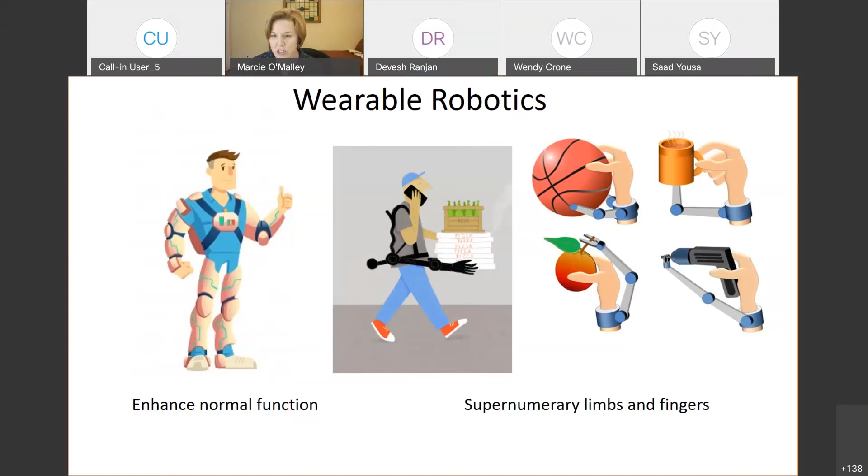So we're going to be diving into just a subset of this area of wearable robotics today with our two speakers. I'm really excited to introduce both Elliott and Aaron, Elliott Rouse from the University of Michigan and Aaron Young from Georgia Tech. Both of these gentlemen are focused on the design and control of wearable prosthetic and orthotic devices for the lower limb. Let me just briefly introduce each of them.

The Big Ten is strong here today.

Elliott is an assistant professor in the Department of Mechanical Engineering at Michigan and a core faculty member in the Robotics Institute. He directs the Neurobionics Lab. His degrees are from Ohio State and Northwestern. He did a postdoc at MIT and was the winner of the NSF CAREER Award.

I asked both Elliott and Aaron to share with me what they think are some of the challenges in the field of wearable robotics. Elliott said he's excited about how we might develop better ways to quantify success of wearable robots beyond the usual quantification of metabolic cost. In fact, it's recently been shown that people are quite insensitive to metabolic rate, which makes that metric less than ideal as a measure of success.

And a fun fact about Elliott is that he left his previous career as a mechanic for a professional auto racing team because he wanted his work to have greater impact on people with disabilities. We are also both from Ohio, so that's another fun little fact.

Aaron, our second speaker for today, Aaron Young, is an assistant professor in the Woodruff School of Mechanical Engineering at Georgia Tech. He directs the Exoskeleton and Prosthetic Intelligent Controls Lab, or EPIC Lab. We are fellow Boilermakers, and he got his master's and PhD in biomedical engineering at Northwestern. He postdoc'd at Michigan, and he recently received the NIH New Investigator Award and the IEEE New Faces of Engineering Award.

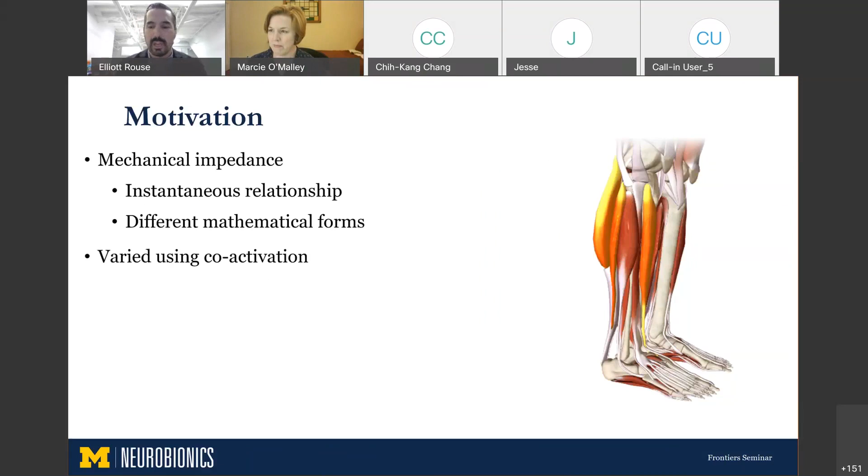Muscles can only pull, so to provide motion and torque in two directions, we have agonist and antagonist musculoskeletal architecture. By flexing these two muscles together, we can change the stiffness without changing the net torque or the joint's position. So we actually have independent regulation of kinetics, kinematics, and this concept, mechanical impedance.

This isn't just a theoretical or mathematical property—it really matters to locomotion. It describes how energy is stored and exchanged between the joints of the leg and how disturbances travel from the center of mass, or from the ground, to the center of mass. These are properties critical for efficient, stable, and agile locomotion.

We often, as roboticists, go back to biology as a blueprint for design and control, and we've seen amazing advancements in this space. An example is agility robotics by Professor Jonathan Hurst, the Cassie robot.

I believe in wearable robotics, bio-inspired dynamics could lead to a more natural response to disturbances, a more intuitive human-machine coupling, getting away from the feeling of riding the technology you're wearing, and ultimately exploitation of the advanced capabilities of the human neuromotor system.

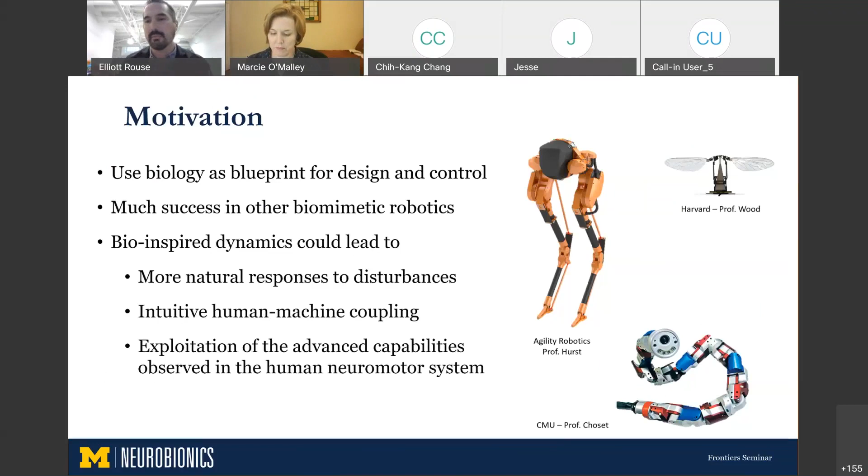This will come up later in the talk, but this two-dimensional set of information is what we would use to design a bio-inspired system.

If we think about what system dynamics or stiffness should the system have to replicate biology, for the past probably 100 years of biomechanics, people would take the slope of this torque-angle curve—it has the right units, Newton meters per radian or Newton meters per degree—and they would call that the stiffness. So it would be something like this.

But as it turns out, that's not true. That's mathematically inappropriate. When muscles are doing work on the body, you can't just take the slope of this curve. Stiffness is a separate property, and some work I did earlier in my career made this point.

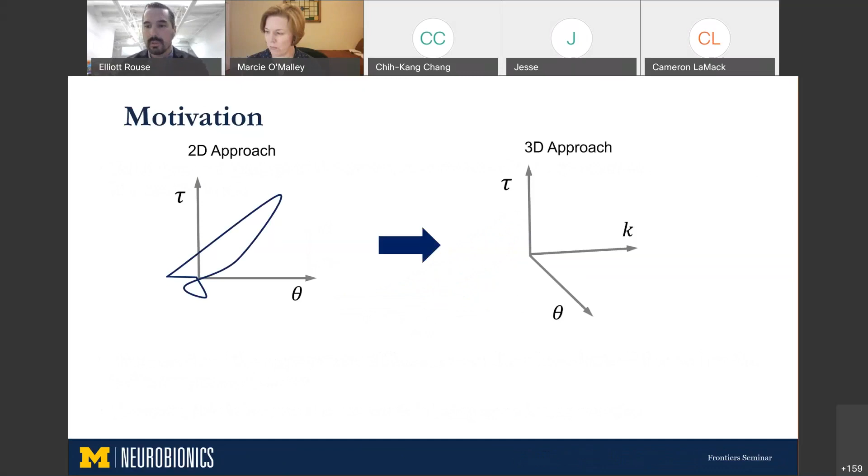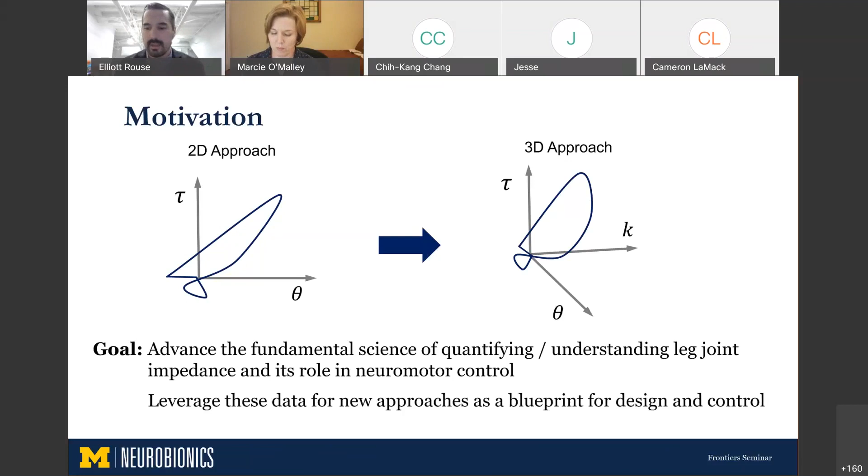One of the overarching goals of my research program is to translate this two-dimensional information of torques and angles to a new type of blueprint, a three-dimensional set of instructions, where we can vary and control not only the torques and angles, but also the joint stiffness information. I would call this probably one of the fundamental goals of my research program: quantifying and understanding these properties, both in the context of wearable robotics and neuromotor control. My hope is that we can leverage this information as a new blueprint for the design and control of assistive technology, and I'm going to talk about this set of information in this talk.

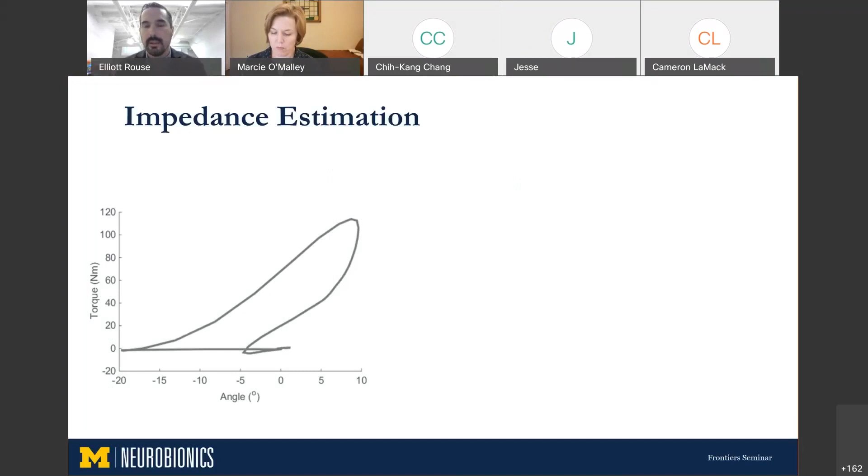The first thing I'd like to describe is how we might get mechanical impedance as a blueprint. Over the last 6 years, we've been working on these methods using the same torque-angle relationship of the ankle, where every step you go around this cycle. To understand the stiffness or mechanical impedance properties, we have to interact with the limb or apply perturbations. Our approach has been to apply perturbations at discrete points within the gait cycle, giving us snapshots of how these properties vary. If we stack these snapshots up in time or in phase, we can get an idea for how the neuromuscular system is regulating these properties. So we've been developing these methods.

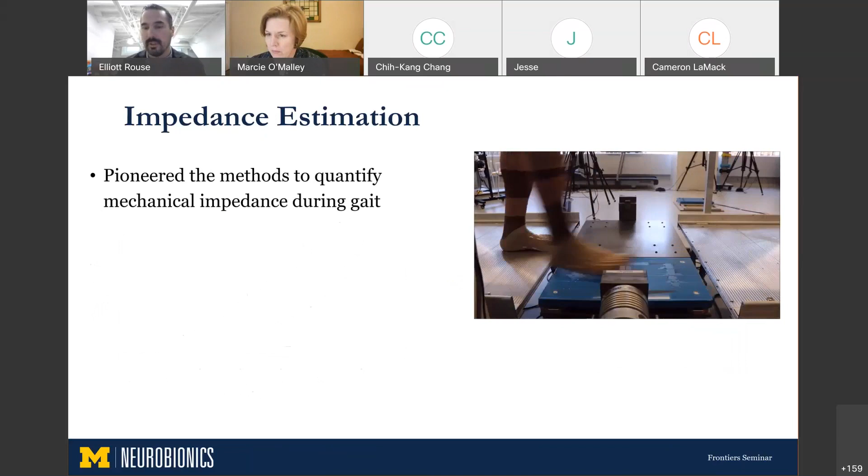This is an example of our experimental paradigm. Someone walks across a walkway and experiences a slight perturbation, about 2 degrees. That blue thing in the video is a force platform, so we measure the force between the foot and the ground. Then we fit a model, a second order mechanical model, between the perturbation displacement and the perturbation response torque, using system identification techniques.

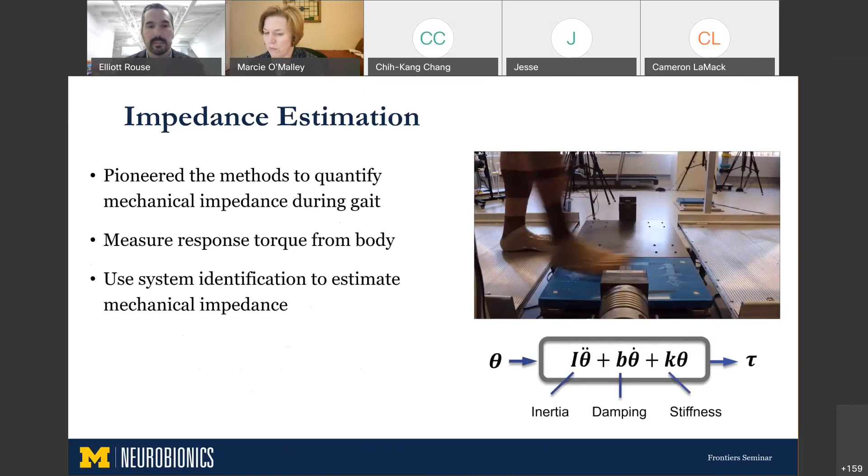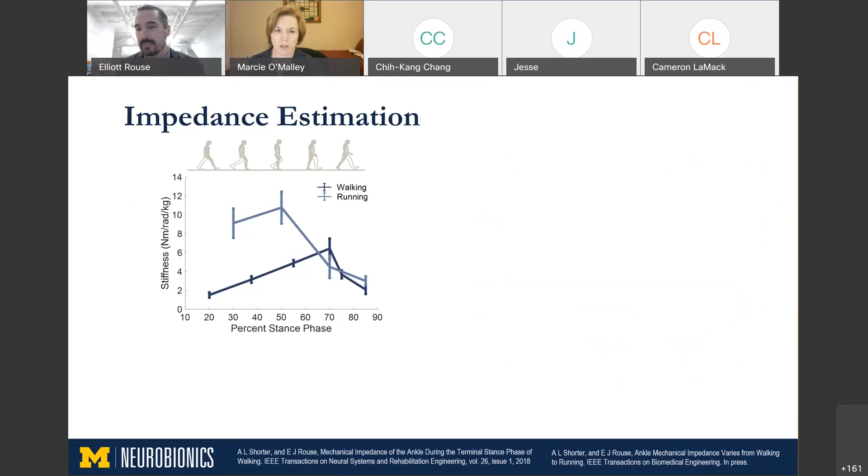What I'd like to show you now is some data we've published recently. In this plot, we're looking at stiffness as a function of percent stance phase. In light blue, we show data from running, and in dark blue, data from walking. The new data in the walking study was the last 2 points, showing what's happening during terminal stance phase. We showed that stiffness is actually much higher in the ankle joint during running, with a similar profile where it increases and then begins to decrease in terminal stance phase, occurring a little earlier in running biomechanics.

If we look at damping, we also see much different responses, consistent with the literature, that the stiffness and damping during running would be much higher because the muscle activation is greater, and damping is known to co-vary with muscle activation.

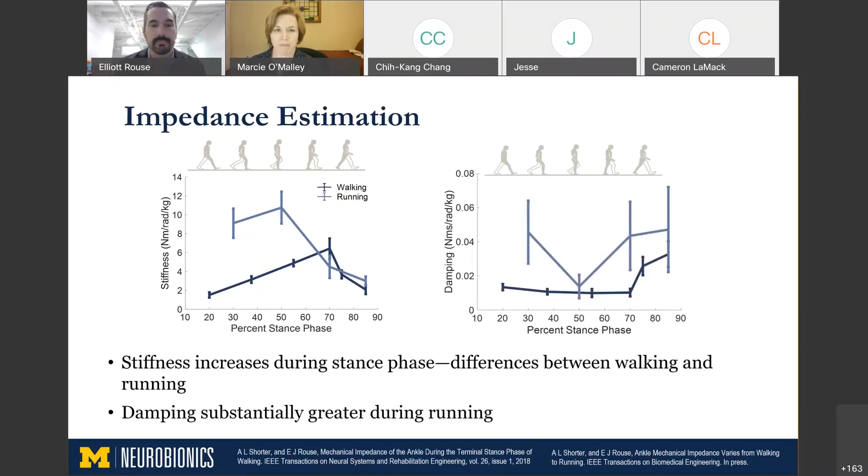One exciting thing I'd like to highlight is that we've also been thinking about extending these methods to quantifying pathological impairments. If you have an upper motor neuron disease like stroke or cerebral palsy, that manifests in changes in coordination and joint mechanics, inhibiting mobility and making it much more difficult for people to walk. These changes, called spasticity and hypertonia in the clinic, we would call stiffness and damping in mechanical engineering. So we can get insight into the changes that occur following a stroke by measuring the mechanical impedance as people walk.

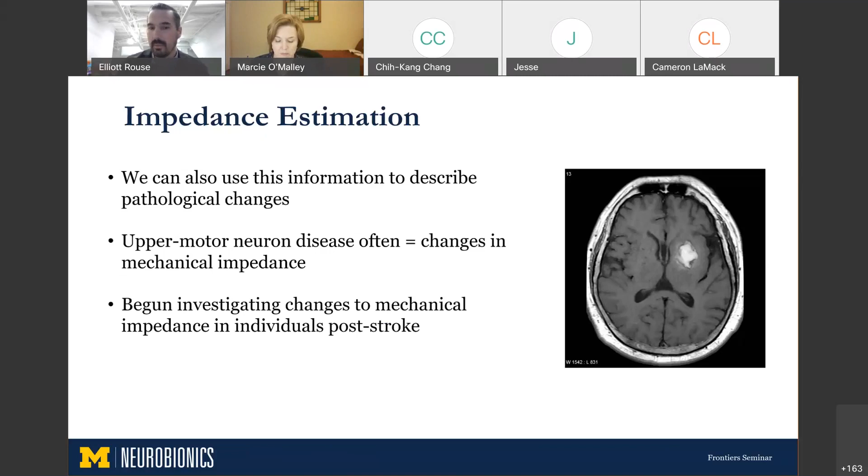These are some data from a recent study we just completed. Again, we're looking at stiffness as a function of stance phase, but here the dark blue line represents the non-paretic side of a person who's had a stroke, the light blue is their paretic or affected side, and gray is older, healthy subjects that are age and speed matched. What we see is that the stiffness of their non-paretic side is actually much greater, while the stiffness of their paretic side is consistent with age and speed matched controls.

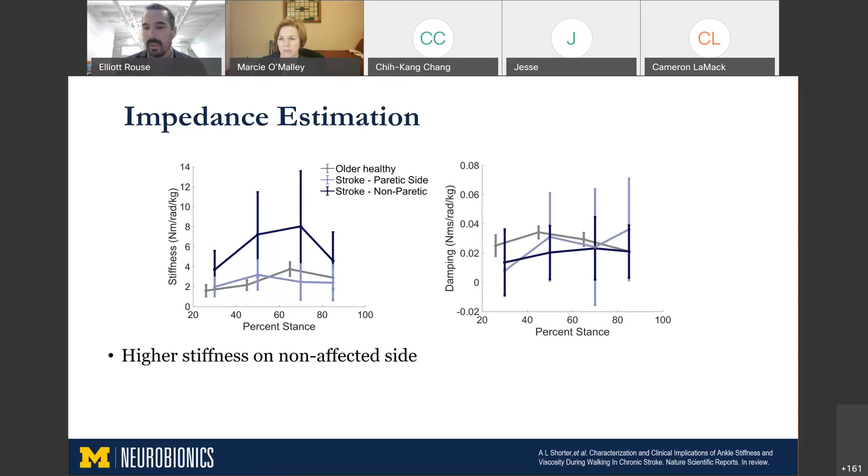For damping, we actually see no changes or increases in data that's consistent with the age and speed matched controls. This highlights an important point about treatment of spasticity and hypertonicity in people with stroke or cerebral palsy, where clinicians get this information by interacting with patients' joints while they're seated at rest, subjectively scoring it on a measure between 0 and 4. Historically, the literature would say we should see increased stiffness and increased damping on the paretic side, but we actually don't see that.

We see no increase in damping at all and no increase in stiffness on the affected side, where we do see a large increase on the non-affected side. I think that's likely due to the greater activation, the harder they're working on their non-paretic side to help push themselves forward during the gait cycle. I think these data really begin to highlight that we need a new way to quantify and assess the changes that occur post-stroke so that we can appropriately treat these patients.

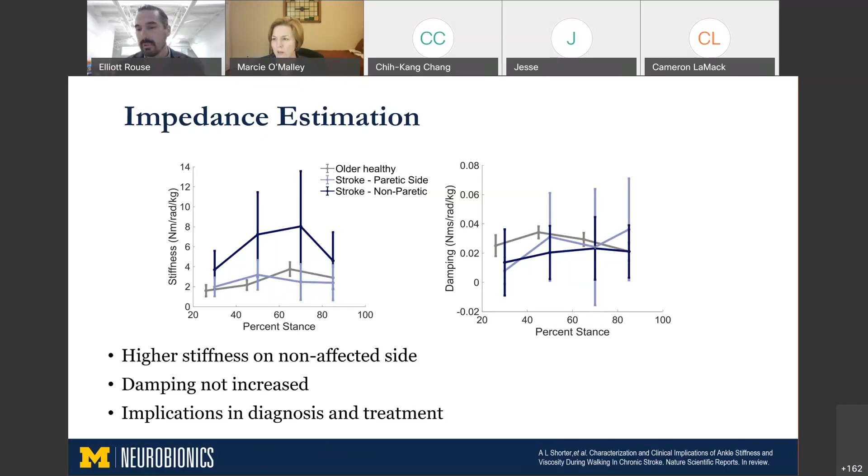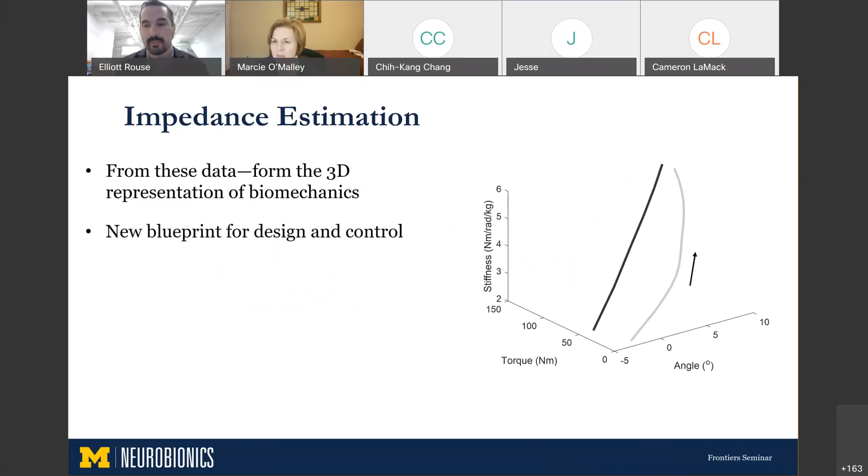What I'd like to talk about for the next few minutes is how we've translated this into wearable robotics. We showed that for the first two-thirds of the gait cycle, or stance phase, a passive system can actually replicate the mechanics of the ankle. So we've designed a quasi-passive ankle foot prosthesis that can replicate torque, angle, and stiffness at once, up until the powered part of the gait cycle. I'll tell you about this variable stiffness prosthetic foot that we've developed.

So this is our technology. We call it the variable stiffness prosthetic ankle foot, or the VSPA foot for short. It has a couple of innovations I want to draw your attention to. The transmission in this system is cam-based, which allows us to specify the exact torque angle mechanics that we want. We're not confined to the mechanics of carbon fiber leaf springs that are consistent with today's conventional prosthetic feet.

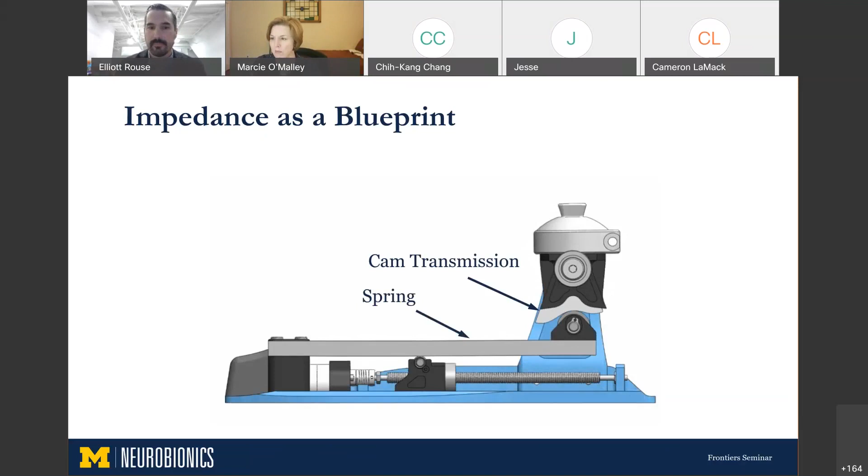So when someone rotates their ankle joint, it deflects that spring and we store and return energy. We can shape this torque angle biomechanics in any way that we want, which is a special property of this prosthesis.

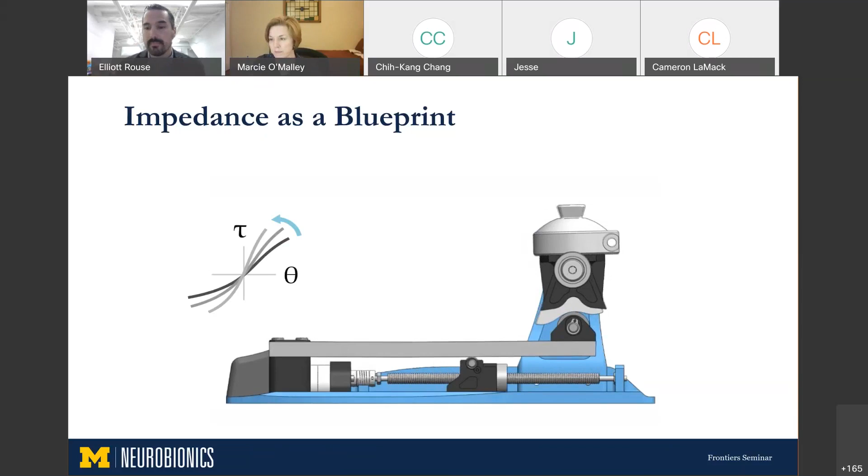The next innovation I'd like to draw your attention to is that we can change the stiffness of this foot by changing the support condition of this cantilever spring. Essentially, we can take our custom torque angle curve and basically rotate it around the origin by modifying the support condition. We would adjust the stiffness step to step while the foot is unloaded. I think this is among the first variable stiffness ankle prostheses that have been developed.

Another innovative design has been developed by Peter Adamczyk at Wisconsin. It's worth looking into.

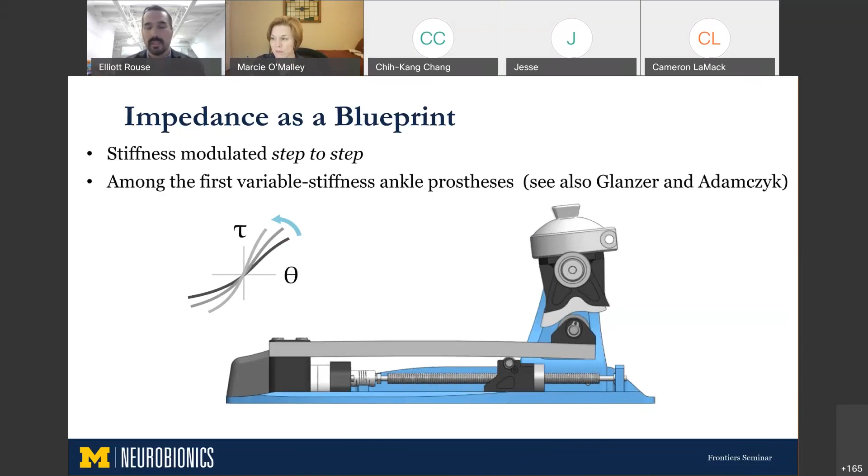This is just a video of somebody walking with the system. You'll see they store energy at heel contact, then return energy, and then store it again over controlled dorsiflexion. They push off with the energy that's been stored. If you look very closely, you can see a slight underdamped response from the ankle, which comes from its efficiency.

We used our torque angle curve to create the appropriate mechanics that would be following torque, angle, and stiffness at once for the first two-thirds of stance phase. And we tested this on the subject.

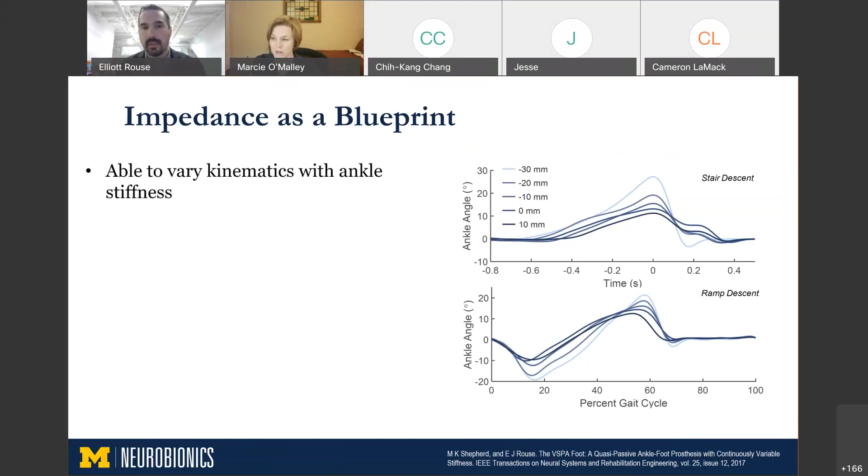You're looking at a single subject's kinematics as a function of percent gait cycle for two different activities. The different lines here represent different slider positions, or different stiffness configurations. What I'd like to highlight is that we were able to vary kinematics by changing ankle stiffness, and we were able to show a much more natural agreement with the range of motion of healthy biomechanics, in part because we can make this foot much less stiff than conventional prostheses, which are quite stiff and have a very constrained range of motion.

Something I'm excited about that I mentioned earlier is that we're translating this out of the lab, and it's being commercialized by a company called Willowwood. I'm very excited to see this potentially impact the lives of patients, hopefully in the next few years.

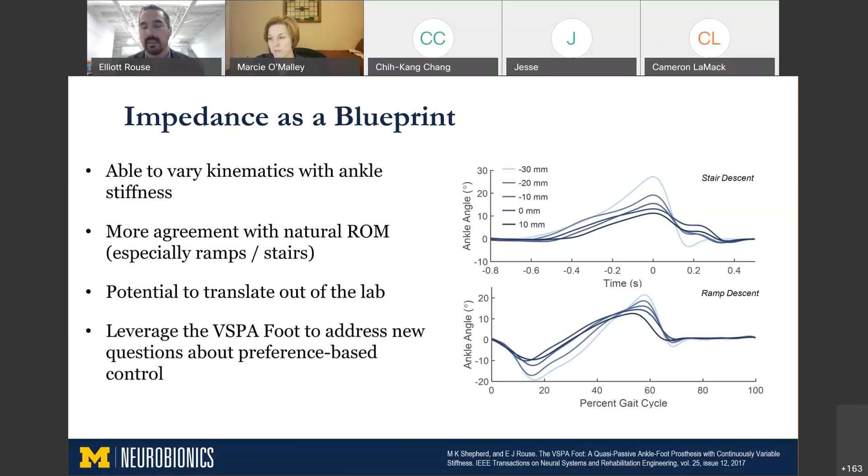So what I'd like to do now is shift gears a little bit and tell you about how we've used this new system, this variable stiffness foot, to address some pretty neat questions in preference-based control. We're going to talk about user preference now and wearable robotics.

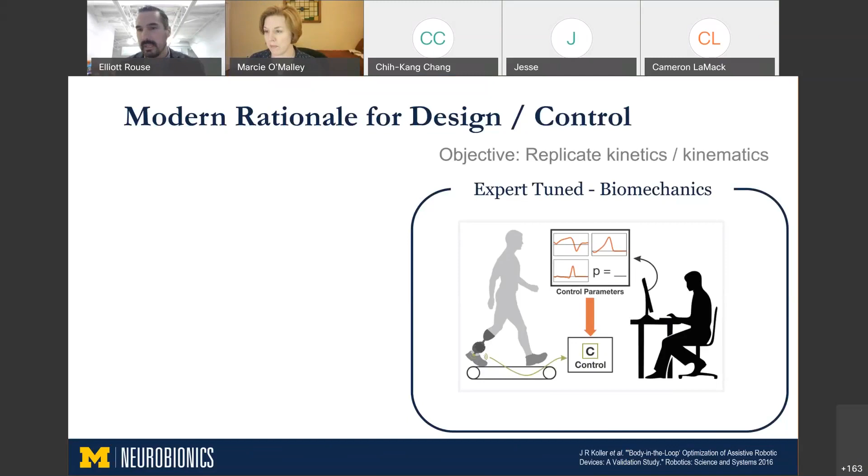The modern rationale for design and control of wearable robotics consists of really two philosophies. The first is expert tuned based on biomechanics, where the objective is to replicate kinetics and kinematics. There's also a relatively new philosophy called human-in-the-loop optimization, where instead of an expert tuning based on biomechanics, the controller is tuned automatically based on a physiological objective function, often metabolic cost. The system tunes itself to reduce the metabolic cost of the wearer, and there have been some very successful studies with this approach.

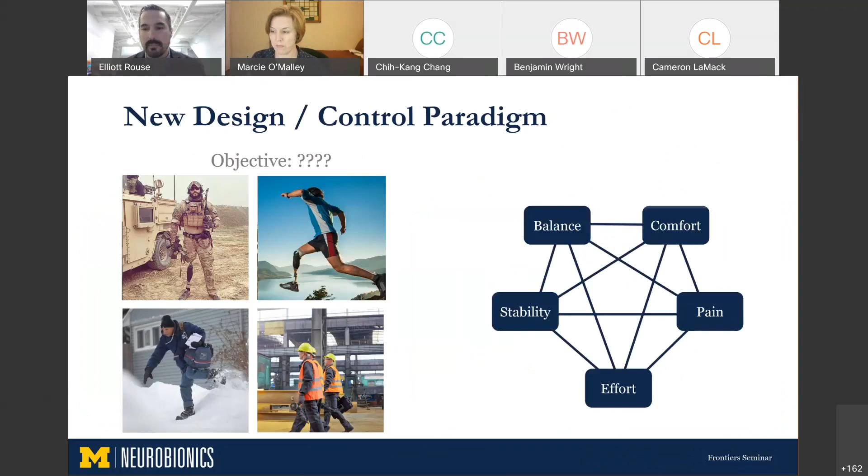But in my research group, one of the things we think about is that people's objectives likely change over time and with different activities. It's not likely that there's one objective that meets the needs of every person in every activity. People probably care about a host of different things: balance, comfort, pain, stability, effort, and the exact emphasis they place on any one of these might depend on the person or the task. So one of our approaches has been exploring using user preference as a way to gauge what the person actually wants, using all of these factors at once and letting the subject tune their own system.

So what I'd like to do for the next 15 minutes is tell you about four project vignettes. These are questions that we've been answering recently.

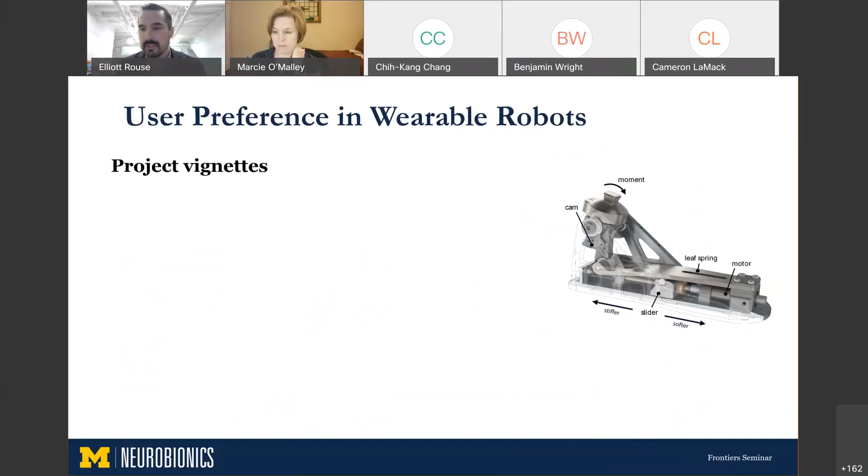The first question I'd like to discuss is: what ankle foot stiffness do people actually want? We don't know that, in part because we never had a system that could change its properties step to step. So let's start by figuring out what people actually care about.

The next question we asked is how does user preference differ from clinician preference? Then we looked at what underlying mechanisms may drive preference—what might people be sensing that's governing their response—and maybe can we use this information in the future to guide the design and control of these systems?

And then finally, I'll switch gears a little bit and tell you about some of our more recent work on preference-based control of ankle exoskeletons.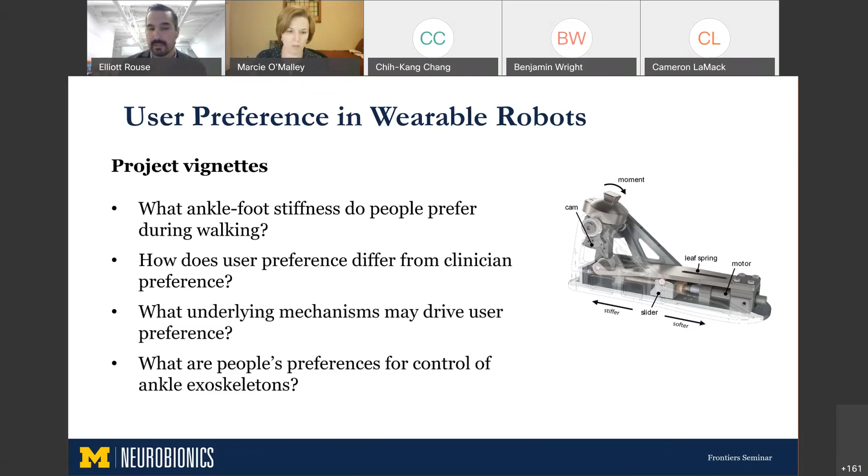The first question we wanted to answer is what stiffness do people actually want? So we created a cam profile for our variable stiffness foot that was linear. I'm showing the torque angle curve here—it's a simple torsion spring. People have access to change the stiffness of their foot by controlling a dial mounted to their waist. As they adjust the dial, we adjust the stiffness automatically while the foot is in swing phase between their steps.

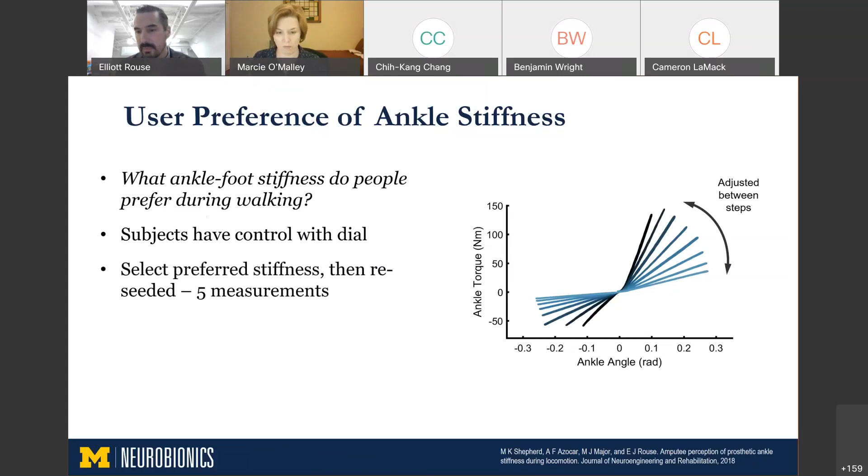We had people walk on a treadmill. We had them find their preferred stiffness using the dial and explore the space. Then we stopped the treadmill, randomly reseeded the dial, and started over again. We did this five times to get an estimate not only of what stiffness people prefer, but the distribution, or variance, associated with it. And the data looks something like this.

We're looking at preferred stiffness here for each subject. There are two things I'd like to draw your attention to. First, people are very consistent—the coefficient of variation here is 14%, so people are actually surprisingly reliable when selecting their preferred stiffness. The next thing I'd like to point out is that people have pretty different stiffnesses, varying by up to a factor of 3 or 4. And all of these subjects had about the same activity level and about the same body mass.

That means when they go to the clinic, if they went to the same clinician, they'd all get fit with the same prosthesis. Yet each person has a different preference, and in fact these preferences span by quite a large amount. I think this has important implications for the future prescription of prostheses. The takeaway here is that people are sensitive, consistent, and diverse in the selection of their stiffness preferences.

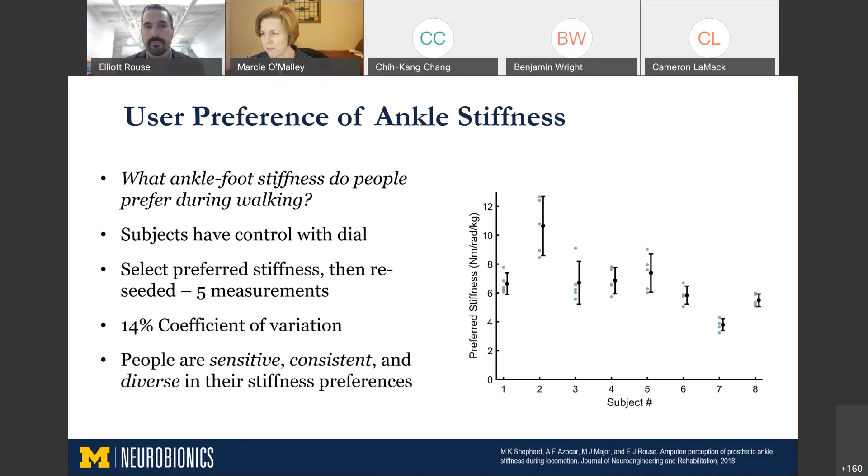The next question we answered is how does user preference vary from clinician preference? This is an interesting study paradigm where we had seven prosthetists observe seven people with amputation during walking. Not every prosthetist observed every patient—we had a group of prosthetists observe a single patient, and we repeated that for all subjects.

Subjects walked across a walkway in front of prosthetists 39 times at 13 different stiffness values. Each prosthetist indicated, based on observation of the person's gait, whether they thought the stiffness should be increased or decreased. Similarly, the experimental subject with amputation also noted to the experimenter whether they would like the prosthesis stiffness to increase or decrease.

We use these data to create psychometric functions that describe consistency and preference associated with stiffness. I'm not going to share those exact functions and psychometric curves because they take some time to unpack, but I have them in backup slides if anybody's interested to see them.

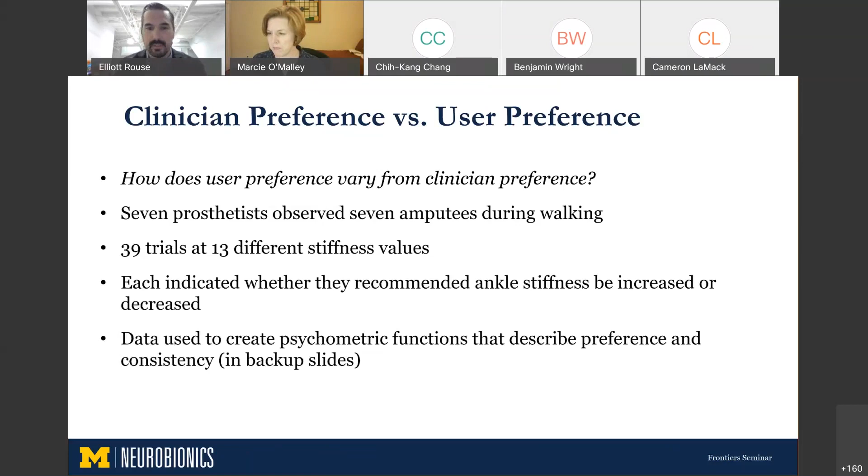This is an example of what the study looks like. Here's the prosthetist observing the patient. And if you look in the back left corner, you see my former student, Max Shepherd, who just graduated and is now working with Aaron Young and Greg Sawicki at Georgia Tech.

These are the data from this study. On the y-axis here, we have the percent difference of the stiffness from the below-knee amputee's preference. So 40 here would say that the prosthetist preferred a 40% stiffer prosthesis compared to the patient. Each color here denotes a different prosthetist.

There are a few things that matter about this plot, but given time constraints I want to draw your attention to one thing: prosthetists prefer, on average, a much stiffer prosthetic foot, about 26% stiffer. This did vary between clinicians and subjects, but what's really important is that subjects have a preference that's much less than prosthetists.

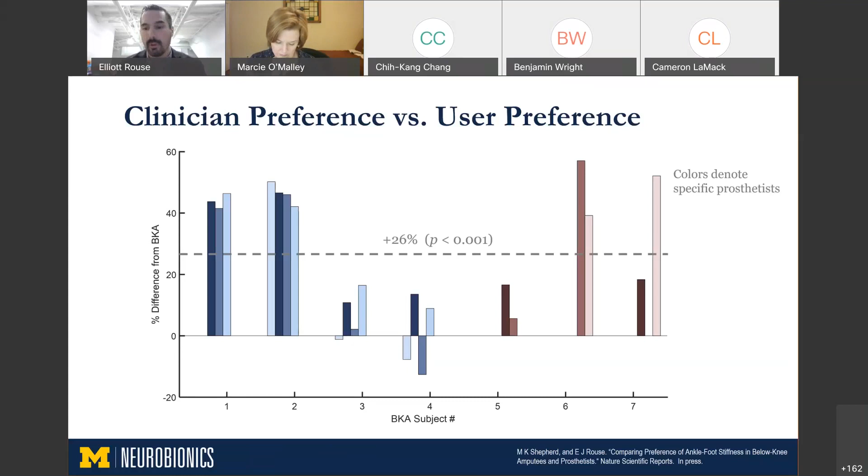The reason prosthetists probably prefer much stiffer feet is because that's the way feet are built today. These carbon fiber conventional prosthetic feet are quite stiff, and they're likely informed by the biomechanics they've been seeing throughout their careers, and now have converged to a stiffness that's much stiffer than maybe what people actually want.

The last project in this series I want to tell you about is maybe what's driving preference. What are people sensing that's actually informing them of their preferences, given that they're so reliable?

For this experiment, we measured 3 people who walked at fractions of their preferred stiffness. So we found their preferred stiffness, had them walk on a treadmill, and then had them walk at stiffness values that were plus and minus 15% and plus and minus 30% away from their preference. We did this across 3 different speeds.

We measured metabolic rate and full biomechanics using an instrumented treadmill and motion capture, and looked at how these kinematic and metabolic factors vary with stiffness. These are the data from this.

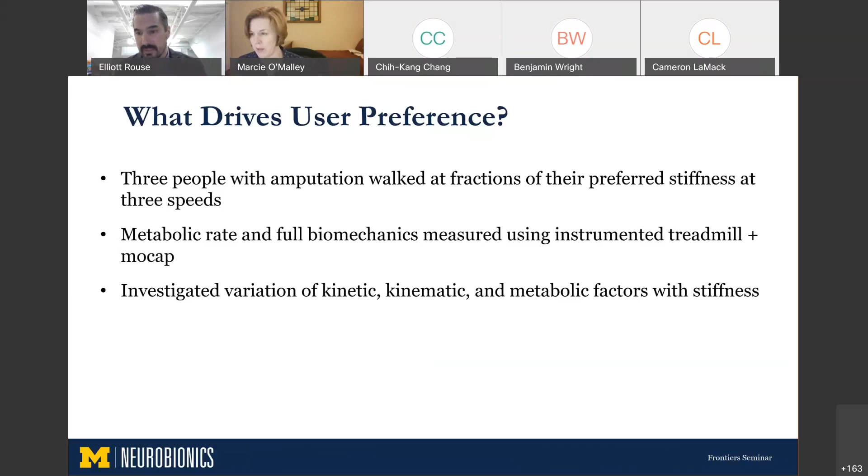I'd like to walk you through these plots from left to right. On the left-hand side, we're showing metabolic cost as a function of ankle stiffness, which is percent deviation from preferred. So 0 represents the subject's preferred stiffness, and then we see plus and minus 15 and plus and minus 30%. Looking at metabolic cost, we see really no relationship associated with stiffness.

The different colors here represent different walking speeds. We see a clear trend with walking speed, but we don't see any trend with stiffness. So people don't seem to be selecting their stiffness based on their metabolism.

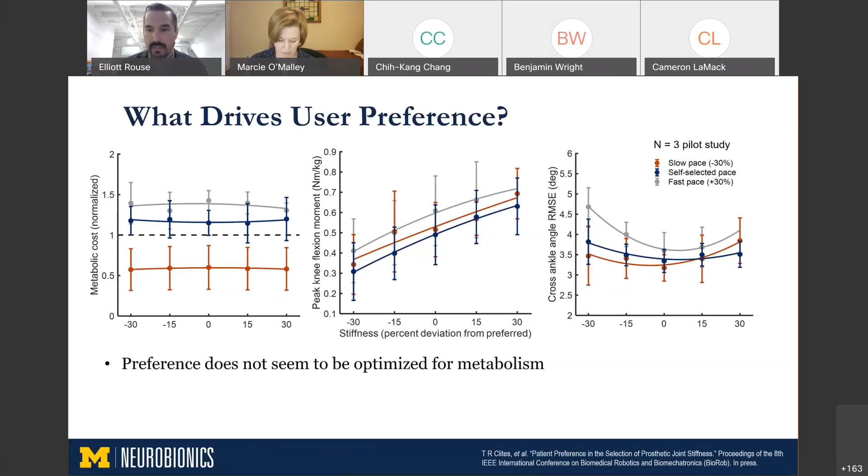In the center plot, we have peak knee flexion moment on the sound side. What we see here is a linear relationship, which suggests that nothing is really being optimized. If they wanted less or greater knee flexion moment, they would move to one of the extremes, either less stiff or more stiff. So no discernible optimum shown.

But then, looking at the plot on the far right, we're looking at cross ankle angle root mean squared error as a function of stiffness deviation. What we see is a second order, or parabolic, relationship that has its vertex within a 95% confidence interval that includes their preference. So it looks like what people are actually feeling that might be guiding their preferences is their kinematic symmetry. They want stiffness values that maximize the symmetry between their prosthetic side and their sound side. And that's a really exciting result.

So the takeaways for this section of the talk are that prosthesis users prefer a much less stiff foot than what is available. Prosthesis users have diverse and consistent preferences. Prosthetists prefer a much stiffer foot, which is more like what's available today.

Users are far more consistent than clinicians in the selection of their preferences, and that stems from these psychophysical curves that I can talk about in the future. And people may prefer stiffness values that improve their kinematic symmetry at the ankle joint, which could have potentially far-reaching effects for the design and assessment of these technologies.

The way that we parameterize the torque being provided by the exoskeleton is using peak torque timing and peak torque magnitude. This plot shows an example of the assistance that would be provided by the exoskeleton, and this really mimics the push-off phase of the gait cycle where the calf muscle is contracting and the exoskeleton helps push them forward.

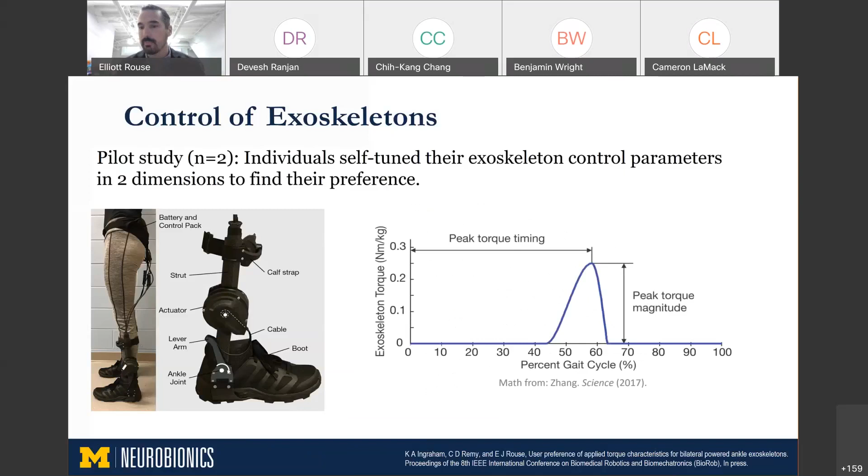We built this into a 2-dimensional touchscreen. Here you see it on a little screen; now we have it on a large tablet. When subjects select on the screen, it maps their selection in 2 dimensions to these different profiles, peak torque magnitude and peak torque timing, and an example of the profiles are shown on the screen. We asked them to explore the space and find the settings that they liked.

On this plot, the x-axis is peak torque timing, y-axis is peak torque magnitude, and you can see where they started. They explored the different control parameters and then found what they liked, up in the upper right-hand corner. We repeated this 4 to 5 times, at 3 speeds.

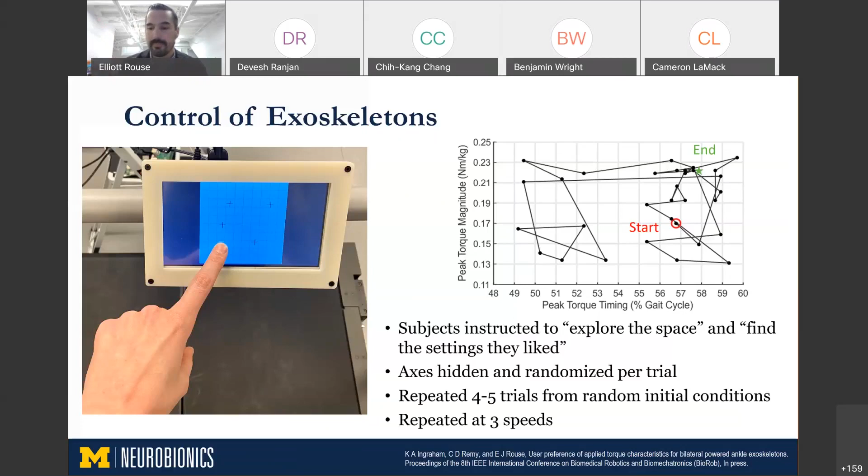And we get data that look like this. Here are our 2 subjects. X-axis is again peak torque timing, y-axis is peak torque magnitude, and we're plotting their response. We fit a multivariate Gaussian to their data. The colors represent the different speeds. If we look at their profiles as a function of gait cycle, we can see the differences in the profiles they preferred across the different speeds.

There's a couple things that stand out. One thing that's important is that people's timing preferences were very consistent, both across speeds and between subjects. But their magnitude preferences were very different. Subject 1 preferred less effort from the exoskeleton, even though they could have had more or less effort if they chose to. Subject 2 preferred much more assistance. So it gets back to this: there isn't maybe one size fits all.

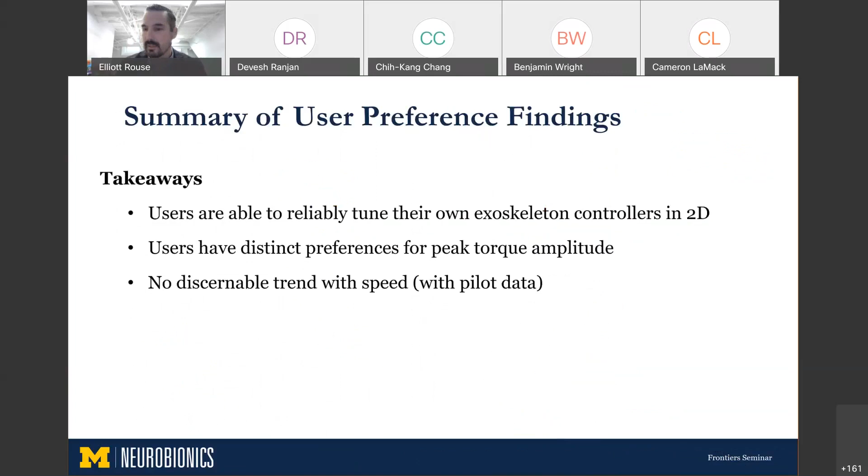So the summary for this initial study in exoskeletons is that people are able to reliably tune their own exoskeletons in 2 dimensions. Users have distinct preferences for peak torque amplitude, and no discernible trend was observed with speed, although this is just our first 2 pilot subjects. Future work will investigate the sensitivity and underlying mechanisms that drive preference, similar to how we've been investigating that in our prosthetic work.

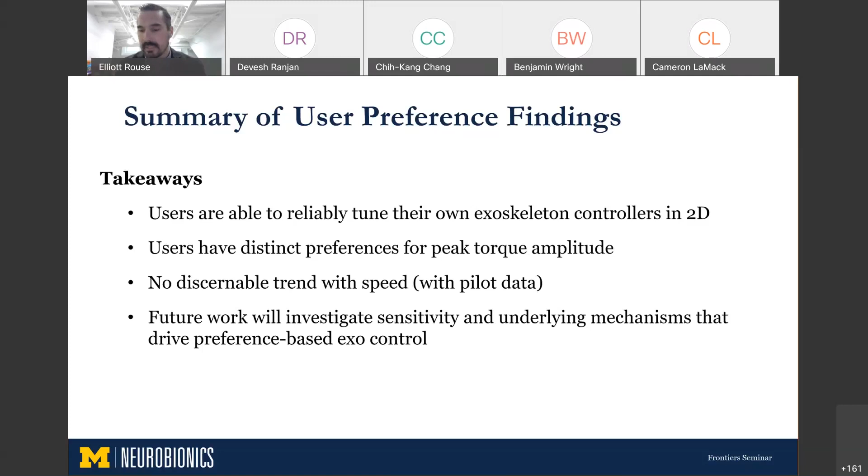So I'd like to take maybe the last 3 minutes and just tell you a little bit about our open source robotic leg.

Control is, in my opinion, one of the greatest challenges to the widespread adoption of robotic legs. In my mind, it's why you don't see robotic legs in the public. It's very difficult to control these systems reliably and safely, and if they make a mistake, it can cause a very serious injury to the wearer. Fortunately, we have many talented researchers around the world studying control strategies to help advance these systems out of the lab. But before someone can study their control strategies, they have to build a robotic leg.

So that's inefficient because now everyone is reinventing the wheel. It costs hundreds of thousands of dollars to build one of these legs, and our community is spending this over and over and over again. It also hinders comparisons, making it difficult when people publish results to separate the impact of the hardware versus the impact of the control strategy.

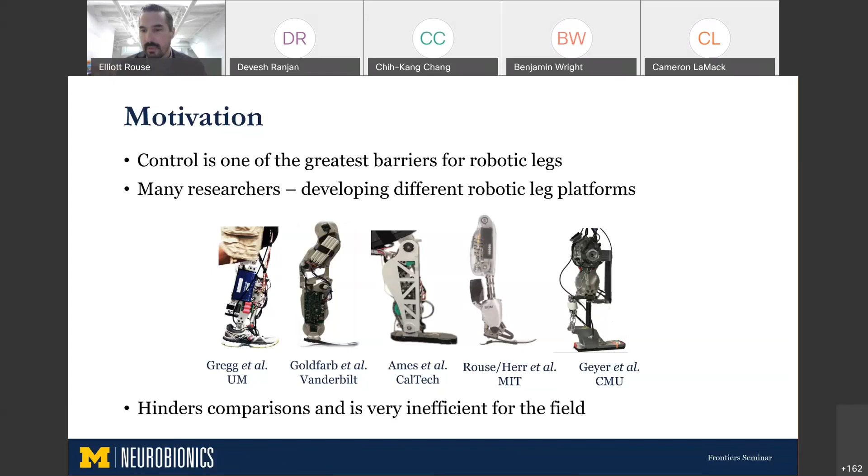So our goal here was to develop an open source platform to unite this field on a common hardware system on which to test their control strategies.

This is our open source leg. It's a modular 2-degree of freedom system, so it can be used as an ankle or knee or both.

If we look under the hood, we can see the internals here. We use motors that were developed by the drone industry that have higher torque and are more efficient. The high torque really opens some doors in terms of design. We're able to get a lower transmission ratio, about 50:1, which is something like 3 to 6 times lower than what's used in conventional prostheses.

We use belt drive transmissions because we have such a low transmission ratio. We chose belt drives because they're quiet, efficient, and low cost, so they don't have long lead times associated with different manufacturers of precision machine components.

We also integrated different sensing modalities into the robotic leg, including a 6-axis force torque sensor shown here, but there's also IMUs, motor current voltage, and encoders at the joints and at the motors. It's fully self-contained, so we want to encourage people to get out of the lab and test in the real world. Each system has an onboard battery and embedded control systems.

And finally, the knee contains a neat technical modification called a selectable series elastic actuator, which I'm going to skip in this talk, but I'd be happy to talk to anybody if they'd like to connect about it later.

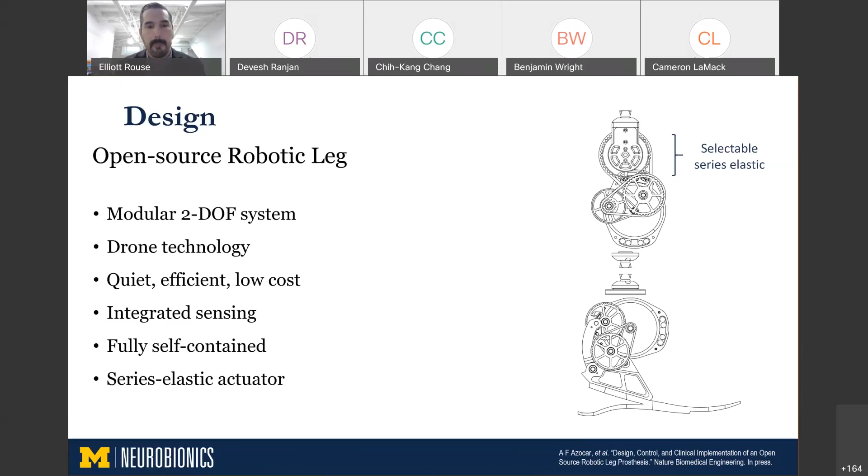Here, this system is being controlled by a $20 Raspberry Pi. We've developed a set of open source Python APIs that can enable people to get up and running very quickly. All of the integration between the software on the microcontroller and the brushless drive has been abstracted, and it's just simple function calls.

I'd like to point you to the open source leg website, opensourceleg.com. We have everything on this website that you would need to manufacture, assemble, and control it. So we have solid model files, bill of materials, quotes, sample emails, detailed assembly instructions, detailed control instructions, software, open source data—sort of everything you need to get going.

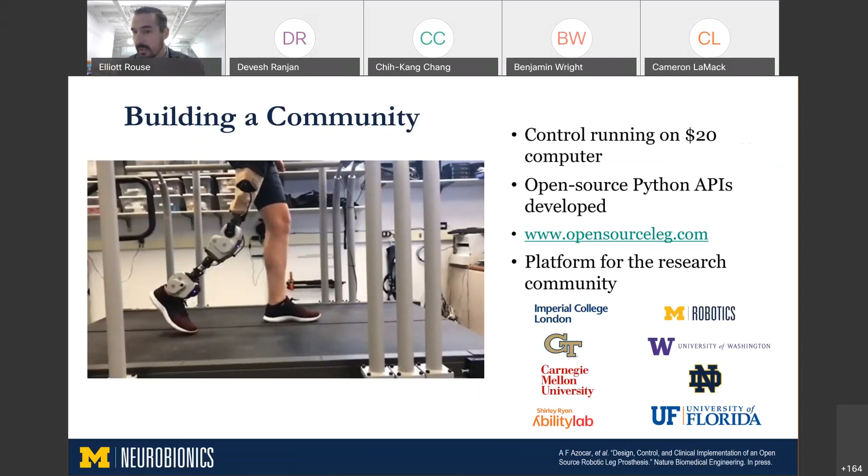The idea here was that we would be developing a platform for the research community, and I'm really excited to share that we have right now 8 to 9 institutions that are either using this or building it as we speak, including Professor Aaron Young from Georgia Tech.

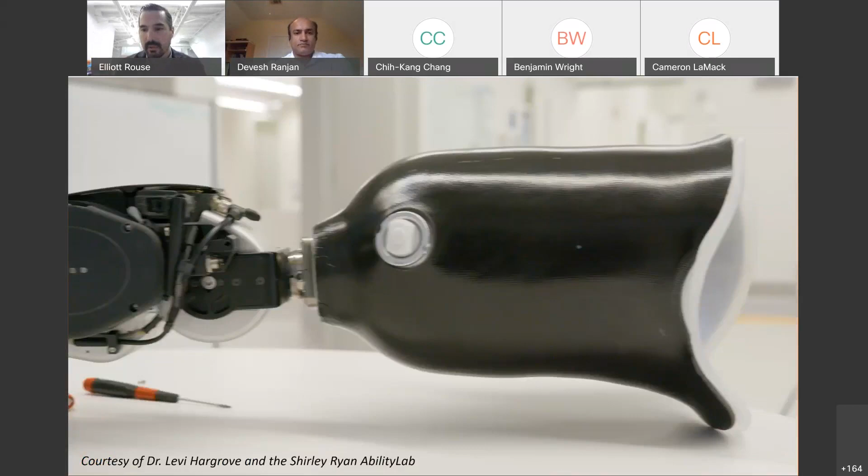So I just want to close with this video. This highlights some of the work of our collaborator, Professor Levi Hargrove, but it shows what this leg was intended for and its capabilities, and really that we're trying to get this technology out of the lab and into people's lives.

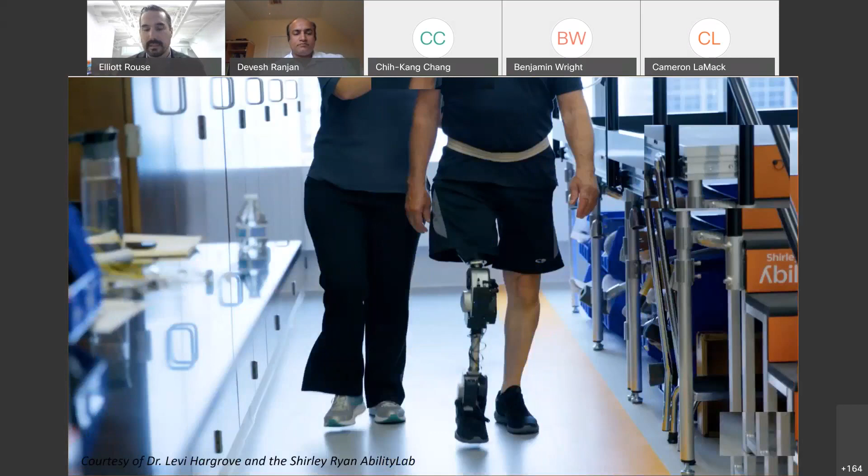This is Terry. Terry lost his leg in a motorcycle accident, and he's been helping us develop this robotic leg through collaborations for the last 3 years.

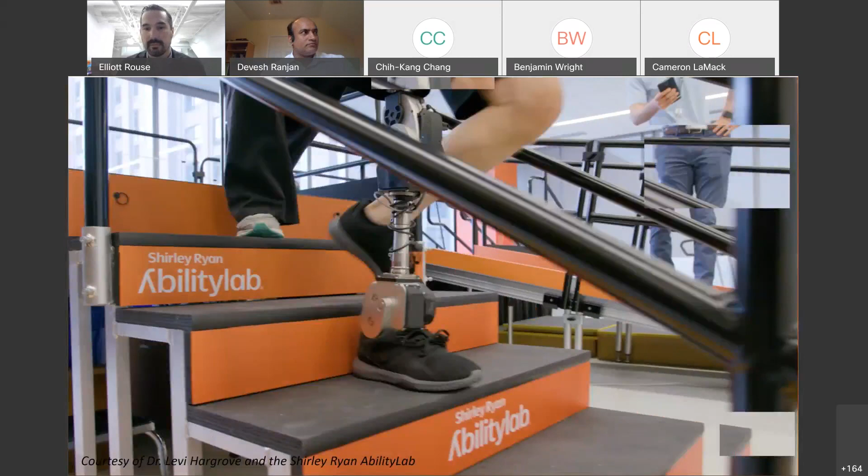So thank you. With that, I just want to close and thank my students who produced this work, my sponsors, our funding agencies, and then showcase the new robotics building that's about to open up. I will be sharing a brand new lab with Professor Robert Gregg, and I am very excited to open that building, and I hope you come check it out.

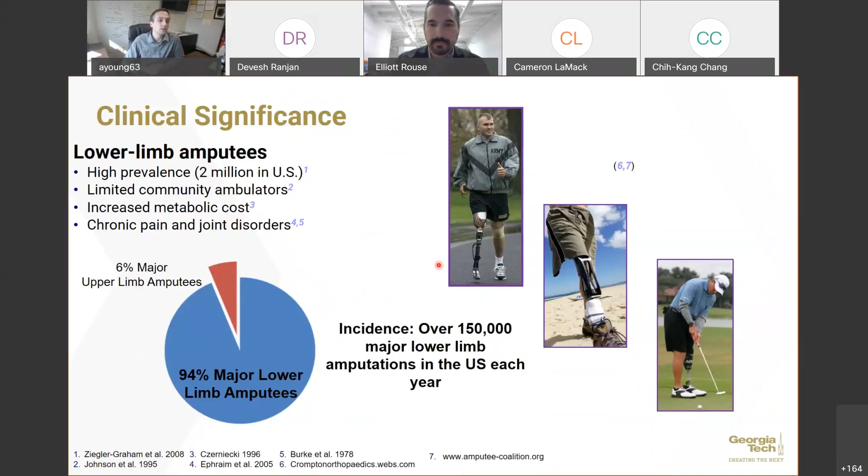One of the big groups with significant clinical impact for this technology is lower limb amputees, of which there are over 150,000 major lower limb amputations each year in the US. This leads to limited community ambulation capability, increased metabolic costs, and chronic joint pain and disorders associated with the amputation, leaving patients with a significant deficit.

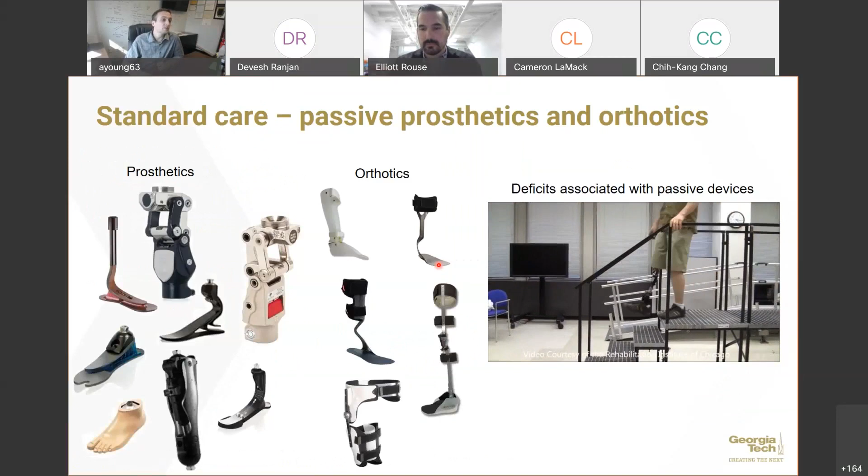The current standard of care is passive prostheses, and for neurologically impaired individuals like stroke survivors, typically ankle foot orthoses are prescribed. These passive devices leave patients with significant mechanical deficits, such as what you can see on the right, an amputee walking with a passive device. What's been exciting in the field over the last five years is that companies and labs have developed a lot of new robotic technology to potentially restore or augment human locomotion performance.

I'm showing the main devices that are now out there commercially. As Elliott alluded to, besides the weight and cost associated with these, one of the main reasons these devices aren't being used ubiquitously is that the control is very complex and difficult, and very hard to generalize to a wide variety of contexts.

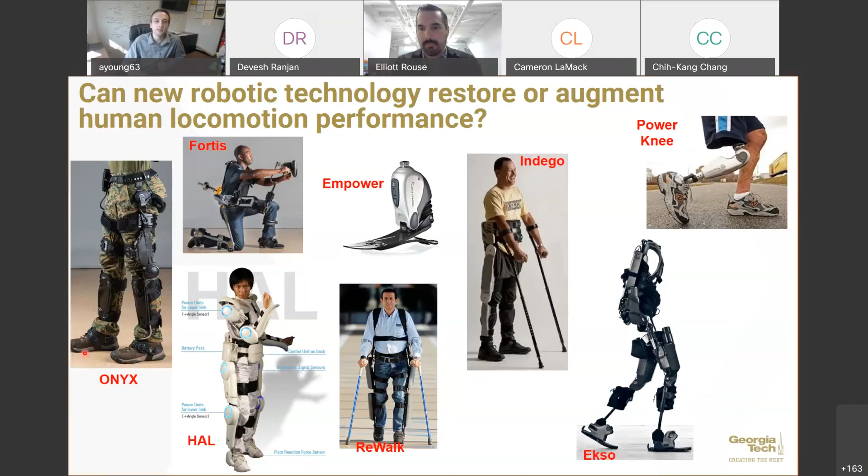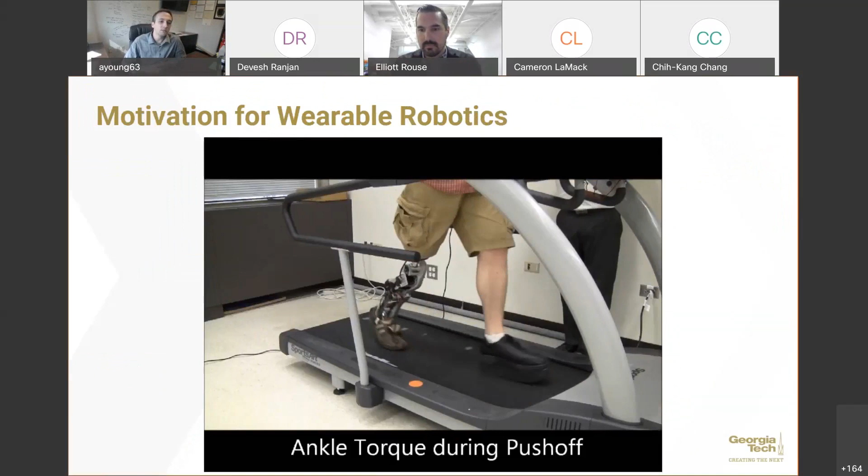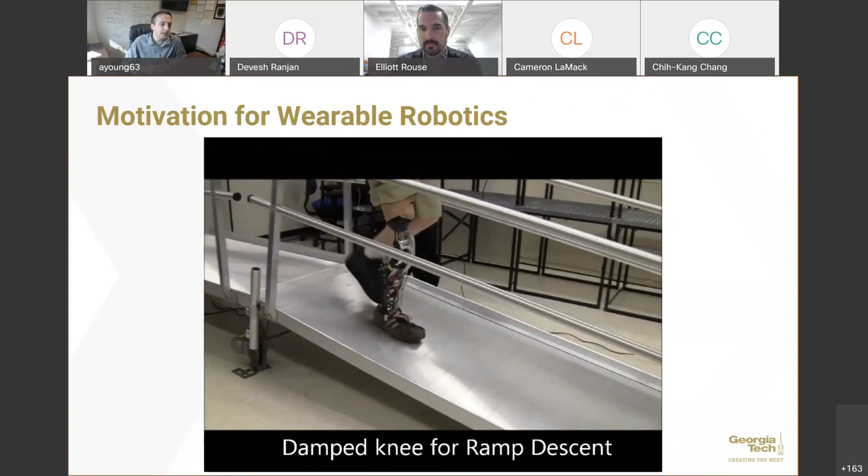But when you talk to patients, one of the main motivations for wanting a robotic device is the ability to do lots of different tasks well, and that's one of the really cool parts about having a robotic prosthesis. As you can see in this video, it restores the capability of being able to do ramps and stairs naturally, going down ramps and stairs. The ability of these robotic devices to change the control strategy and adapt to help with many different states is a really important advantage of robotic exoskeletons and prostheses.

But to do this requires really smart and advanced control systems. In my lab group, we typically divide the control between three fundamental layers. One is the high-level controller, which primarily does what's called state estimation.

My group studies both the high and mid-level control, but since this is a shortened talk, I'm just going to focus today on the high-level control aspect, which is really the state estimation.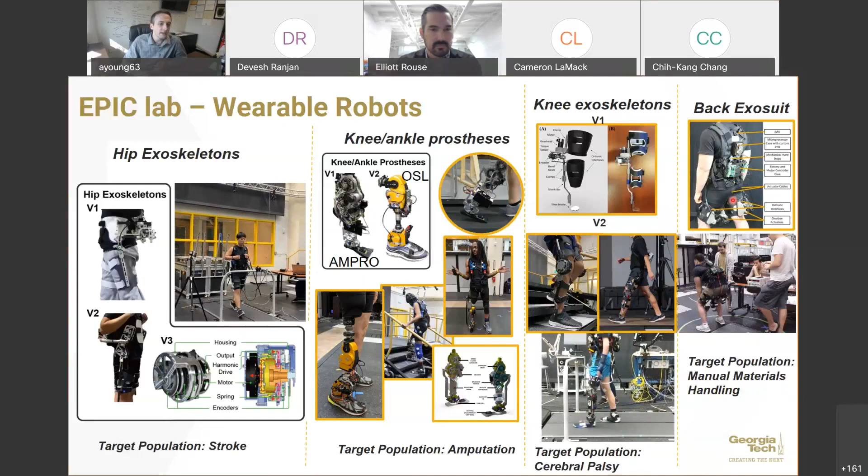We also do work with knee exoskeletons for cerebral palsy patients, working on rehab therapies to improve their motor functions. Finally, a back exosuit - Marcia actually touched on this - for industrial applications for workers with significant manual materials handling jobs that lead to back problems and injuries. So there's a wide range of use cases for this wearable robotic technology that we're excited about, and having these devices allows us to study the science of how control affects human biomechanics in each of these different groups.

To get started, I want to introduce the idea of the important human states that a wearable robot might care about or interact with. One of these is user intent - trying to understand what the human user wants to do. Do they want to speed up or slow down, or even change their mode of walking to running, or transition to a stair step, for example - these are all good examples of potential user intent. Another important thing for the wearable robot is the environmental state.

So are they walking on rough terrain or level or unlevel terrain? These types of things all might affect how the controller might assist the human user.

And then finally, another potential capability these devices have is to really understand and monitor the underlying physiological state of the user. This may involve looking at underlying muscles or joint loads, monitoring fatigue or excess joint load, and potentially intervening appropriately to provide increased safety and enhancement to human users.

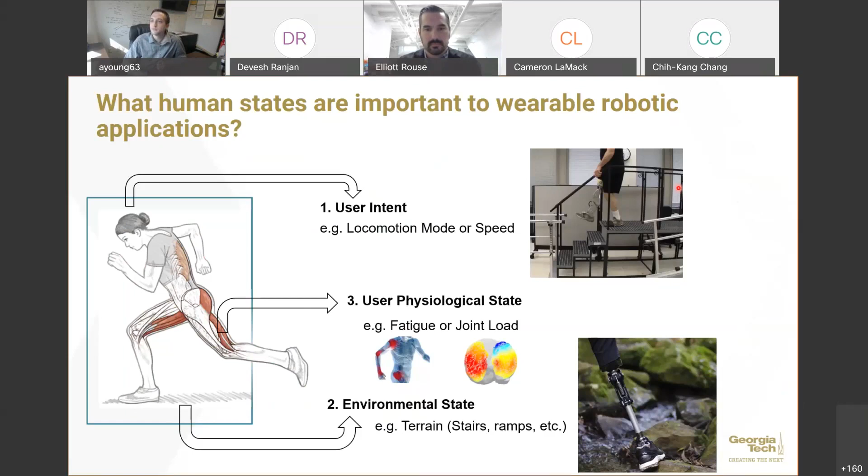So I'm going to walk through these. We do work in all three of these areas, but I'll start with our work on intent recognition.

One of the ways we've typically thought about intent recognition is transitioning between a lot of different locomotion modes, which is something we do every day in normal community ambulation. Even just going from one class to another for a university student, you might transition between these different states 10 different times. The idea is we really want wearable robots to have a way of seamlessly, naturally, and automatically transitioning between all of these different states for the human user.

One of the main technologies we've looked at to do this is known as sensor fusion. The idea is we can take sensors from the robotic device itself, including joint encoders, load cells, IMUs, and other mechanical sensors, and fuse these with wearable sensors that we might place on the human user to give us an additional set of information.

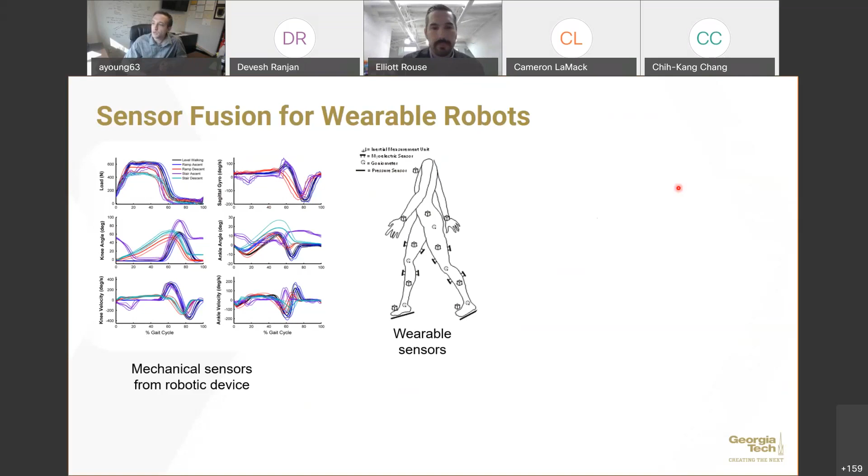One of these wearable sensors we've especially spent time looking at is EMG, or electromyography, which records the electrical potential of muscles through surface electrodes. This can give us a feed-forward window into the neural control of the human user, which can be really potentially valuable for human intent recognition.

All of these can be combined or fused through a machine learning system. This is a typical pipeline my lab group might use for these machine learning applications, where we take a lot of different sensors, do some basic signal processing on those, and then extract statistical features through the sensor fusion algorithm. These different features are then fed to usually some sort of machine learning classifier.

This could be a neural network or a linear discriminant analysis. That classifier will rank order the different classes and produce a likelihood of how likely the user is in any given class. That likelihood information is often fed to something like a dynamic Bayesian network, which I think is really important for gait applications, where the sequential modeling of gait, or the time history, is incorporated into the decision through something known as a transitional probability matrix, which encodes the probability of transitioning between each of your given states.

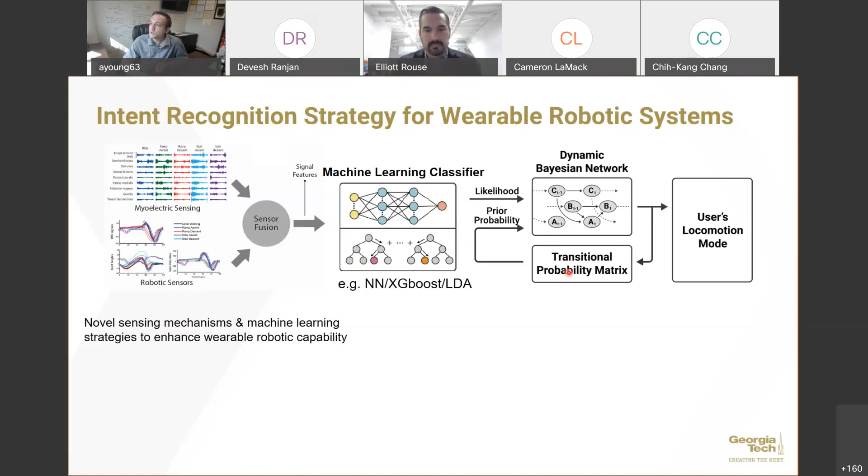This allows for a smooth output of the user locomotion mode, including things like sitting, level walking, ramps, and stairs.

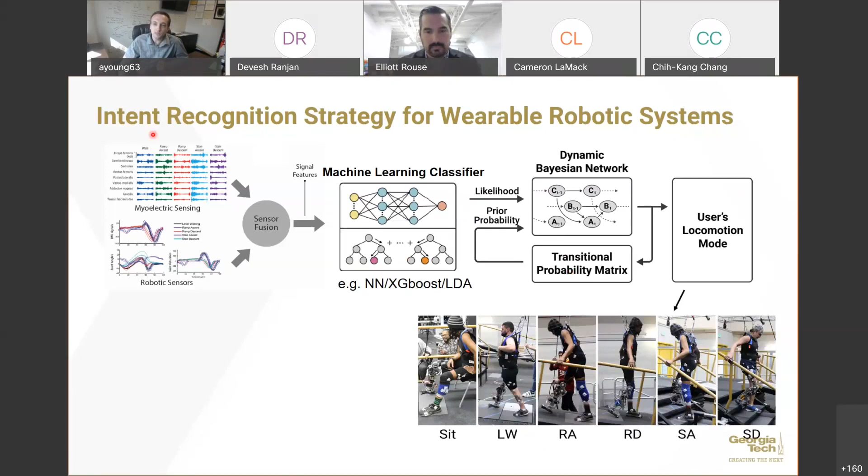So this was, I think, a cool early result, but we can even take this a step forward and implement these into online systems, which is some of our work that we published in JAMA a few years back.

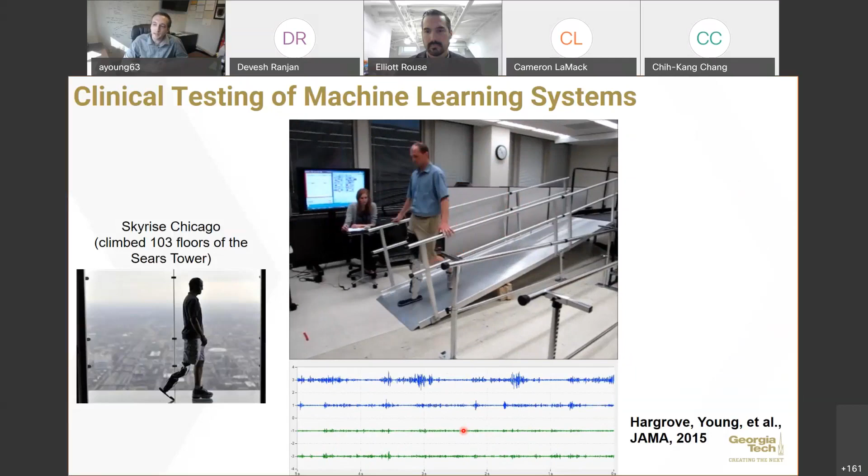This shows EMG being generated in real time and a machine learning classifier that's automatically switching the amputee between going up the stairs or going down the ramp, where all he has to do is think about it, and it automatically and seamlessly switches between these different locomotion modes using this machine learning system.

Another cool thing we can do with EMG is run a pattern recognition algorithm, where we take those patterns and allow him to have direct control of the knee or the ankle, at least while he's sitting. These are some of the really cool capabilities that these high-level controllers can give us.

One of the things we did was take this amputee up 103 floors of the Sears Tower with this system, which is kind of exciting, showing that these things can work out in the real world.

I think this potentially is a good advancement for wearable robotics, with the ability of allowing these systems to modulate better community ambulation.

But there are still some significant challenges and reasons why this technology is not yet deployed. A couple of them that our group has been tackling: first, the system is very discretized, which is not necessarily representative of real world ambulation.

The current system just outputs level walking or taking a step up a ramp. But in the real world, people want to walk at a lot of different speeds or on different incline or ground inclination angles, and these systems don't do a great job generalizing to the wide variety of contexts that actually exist in the real world. So there's a big challenge in how to generalize to real community ambulation.

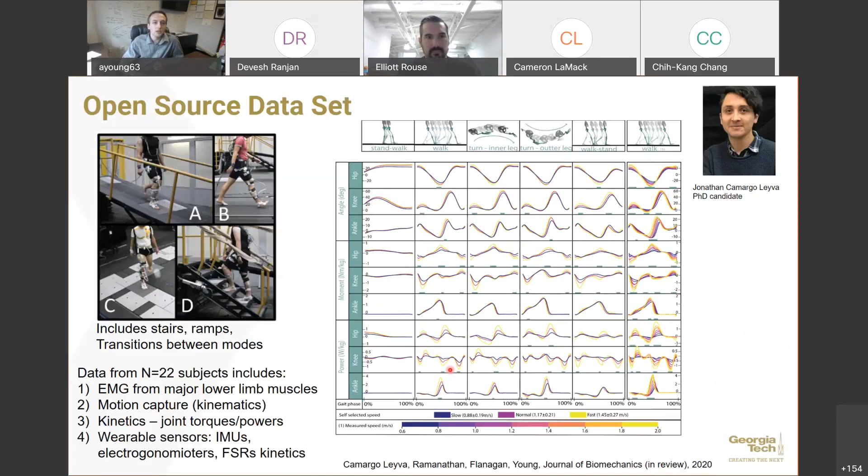With this, we've developed a new part of the pipeline to our standard machine learning system: an environmental parameter regressor. This new component allows for continuous state identification of the environment. So now a system can say not only are you going up a ramp, or about to take a step up a ramp, but that ramp is a 10-degree incline or a 5-degree incline, and we can smoothly scale the assistance on a device appropriately. This is a nice advancement in terms of the ability of devices to recognize human motion intent and environmental state.

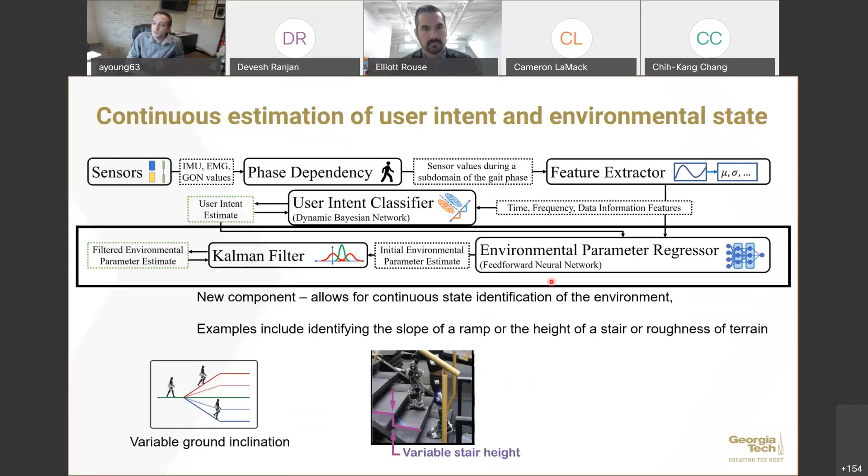We've taken this a step further and looked at how this affects human biomechanics on the stairs. In this case example we're comparing an active prosthetic to a passive device. One of the big differences is that on the powered device we're delivering an early stance knee extension moment, which allows for a step-over-step stair ascent gait that isn't possible on most passive prostheses.

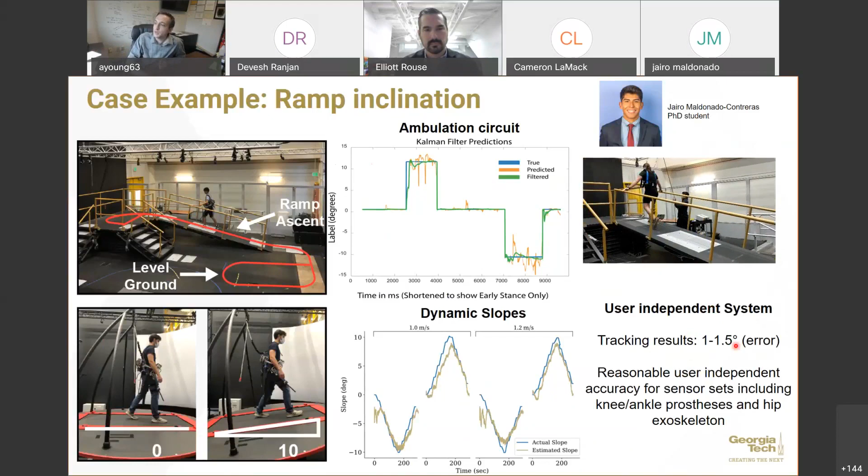This is work that Jairo, a PhD student in my lab, has been working on. It's actually a fully user-independent system. Basically what that means is we're taking a big pool of subjects, training the data from that group of subjects, and then testing on a withheld user. That allows us to track, for a novel user, their ground slope estimation. We think that this is pretty good tracking error, at least for a user-independent problem, ground slope seems to be fairly reasonable.

Another area that we've done a lot of work to extend these systems to allow for continuous state estimation is walking speed, trying to understand how fast someone wants to walk. Do they want to speed up? Do they want to slow down? This is work that Krishan Bhakta in my lab has done.

One of the things that I thought was really interesting from some of the work he's done is a good point to why these machine learning systems are not perfect: they do a great job of interpolating, but they tend to not extrapolate. What I mean by that is if you take one of the training points or one of the speeds and remove it from the training data you give to the machine learning algorithm, but then test on it, it generally does a great job of recognizing, as long as you withhold that sort of within the realm of the training data.

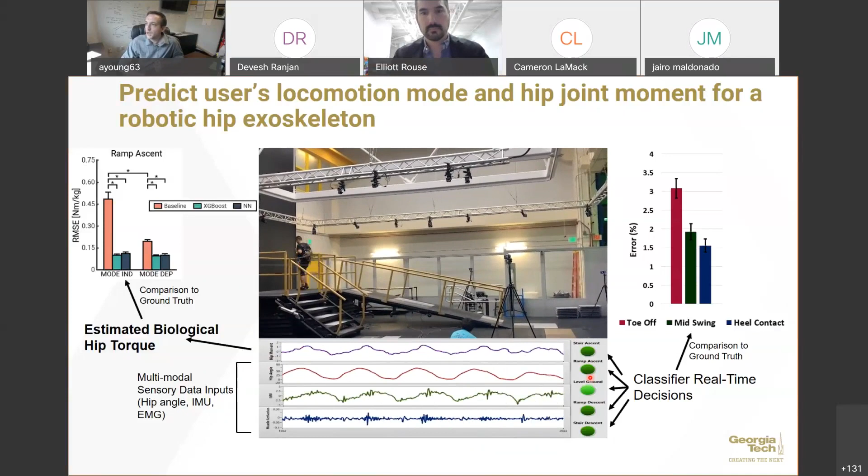Thank you, Aaron. So it looks like Elliott was already answering the question in the chat. So if you have a question for Aaron right now, go ahead, because Elliott has just answered most of the question, if not all of them.

Aaron, one of the questions is: can't you estimate user intent using a perception system, using a camera, and have an ANN predict what mode of locomotion the user is going to employ? Yeah, that's a great question.

So machine vision, I think a few groups in the field have really been looking into that. Helen Huang's group, for example, has been using a laser sensor to do depth perception. I think that's a potential alternative approach compared to wearable sensors. What's a little difficult about it, of course, is now you have to add this camera, and typical machine vision systems require very intense, large processors that need to be on there to utilize those properties. So it's definitely a lot of hardware and additional computational power you're going to have to add.

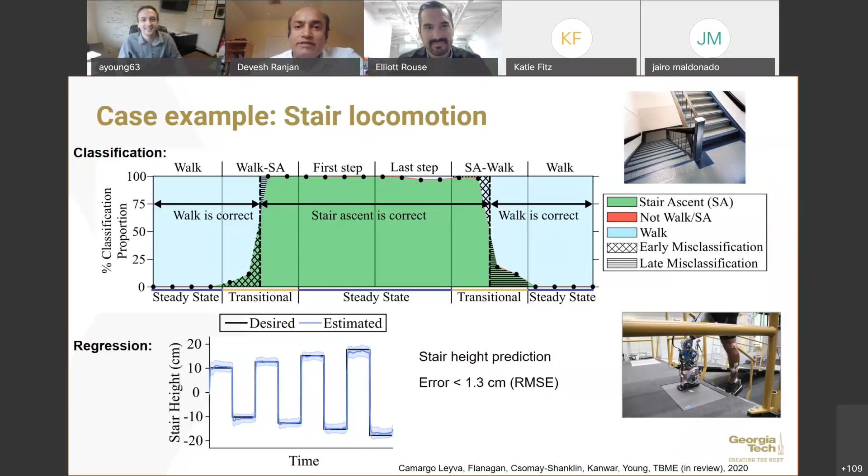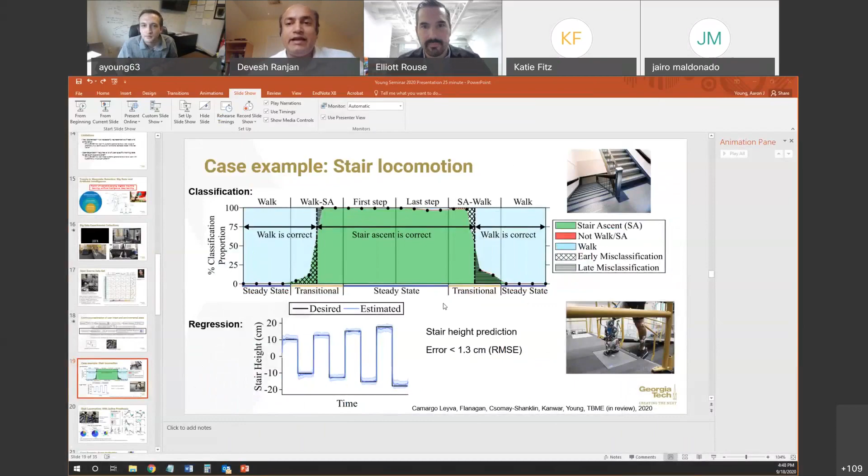Hopefully that answers it. Thank you. So Elliott, I think you've already answered all the questions, but can you summarize some of these, and maybe in 30 seconds give a brief pitch of a couple of questions? You want me to summarize the questions that got asked and answered? Yeah, a couple of them. Not all of them, but for the audience who cannot read them.

Hyunglae Lee asked if we'd looked at weight-bearing asymmetry as a potential explanation for the high stiffness on the non-paretic side. That was a really good point, so we haven't looked at that. We do have a force platform only on one of the legs, but stroke subjects oftentimes bear weight on their sound side more than their affected side, and maybe that's potentially contributing to the increase in stiffness. So that was really great.

Greg Sawicki asked, do we think that there's maybe a difference in preferred settings for each exoskeleton operating at a different joint? So this would be like maybe people care about peak timing for their ankle, but maybe they care about a different factor for their knee, and have we explored that, and how might we handle that? The answer is we haven't yet explored different joints. We've only been working with the ankle at this time, but I'd like to see our approach not confined to even one or two dimensions, that we're actually able to tune multiple dimensions at once. We're working on approaches to make that possible, so that people are able to customize or tune very large dimensional controllers, emphasizing the aspects of that controller that they find most important.